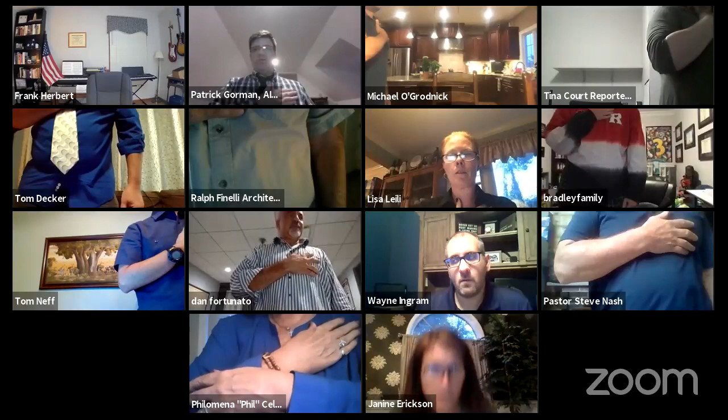I pledge allegiance to the flag of the United States of America, and to the republic for which it stands, one nation, under God, indivisible, with liberty and justice for all.

This meeting will be conducted virtually. The public will be given an opportunity to participate remotely through Zoom by following the instructions listed in the agenda, which has been posted on the township site. All documents pertaining to any applications on the agenda were available on the township website prior to this meeting. Board members, staff, and consultants will be participating remotely. Applicants will be presenting remotely and will identify themselves before testifying.

This meeting has been duly advertised according to Section 5 of the Open Public Meetings Act, Chapter 231, Public Law 1975, called the Sunshine Law. Notice of the 2020 annual meeting schedule has been provided to the officially designated newspapers, the township clerk, and posted on the bulletin board at the Hillsborough Township Municipal Building. Tina, would you take one more thing? Additional notice has been provided to communicate this meeting is being conducted by electronic means only. Tina, would you call the roll, please?

Mr. Stamler, here. Ms. Haynes, here. Mr. Sirachi, here. Ms. Leili, here. Mr. Valchek, unmute yourself, Frank. Here, thank you. Ms. Erickson, here. Mr. Walmarker, here. Mr. Basil, here. Chairman Herbert, here. Mr. Gorman, present. Mr. Anderson, I am here. Mr. Neff, here, and I am here, and Mr. Kinsler is here.

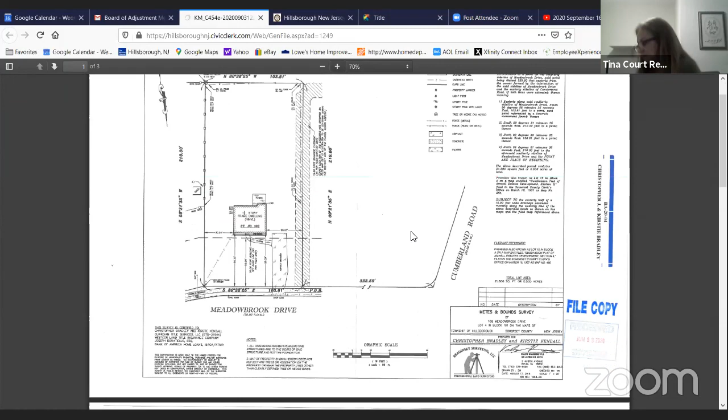Okay. Thank you. On the project, when we need to start, Mr. Fortunato, yes, we need qualification first. Yes, we were going to do the educational background for a moment. Mr. Fortunato, for the board's reference, we need to swear and have you recognized as an expert in this field. Can you please give the board the benefit of your educational background? Yes, I have a Bachelor's of Industrial Design from Ohio State University and a Bachelor's in Architecture from Drexel University. Licensed in New York, New Jersey, Pennsylvania, and have appeared in front of this board several times. Thank you, Mr. Fortunato. At this time, I would ask that the board accepts Mr. Fortunato as an expert in the field of architecture.

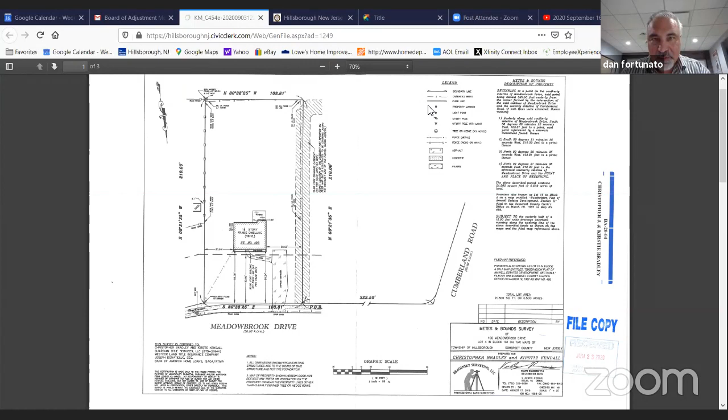When the Bradleys approached me about doing this project, we knew a variance would be required and we knew this going into the project, but basically the needs of the house far outweighs what they really needed to provide here. The house is a bit of a salt box style home. So even though it is a two-story, the entire back half of the house is unusable as a second floor because the roof slopes basically from the second floor right down to the first floor.

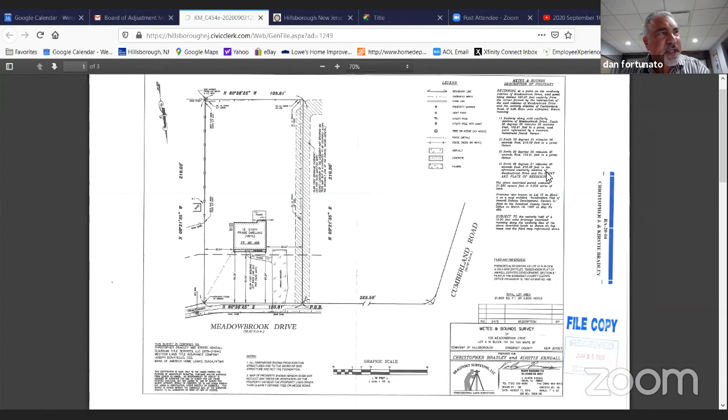So essentially only the front half of the house can be used for a second floor. Looking at the floor plans, slide A1, that's the original survey there. On the floor plan, the right side where the addition is, the gray walls, we needed to achieve a larger home for them since they are a growing family. They do have a newborn, and the master bedroom on the second floor with the master bath suite and so on is really the best option that you can really achieve with this house. Of course, a garage is needed, so we opted for the 2-car garage, and that would accommodate the second floor, which would be the master bedroom, home office, and the bathroom.

And then that's essentially the part that is in a violation or encroachment for the setbacks. The rear part of the house, which is not in violation, is an extension for their home, a dining room and a mudroom coming off of the garage. Basically, the rest of the house will remain as is. They have a living room and a dining room and first floor playroom. And of course, the bedrooms will be on the second floor, basically making this a 4-bedroom home.

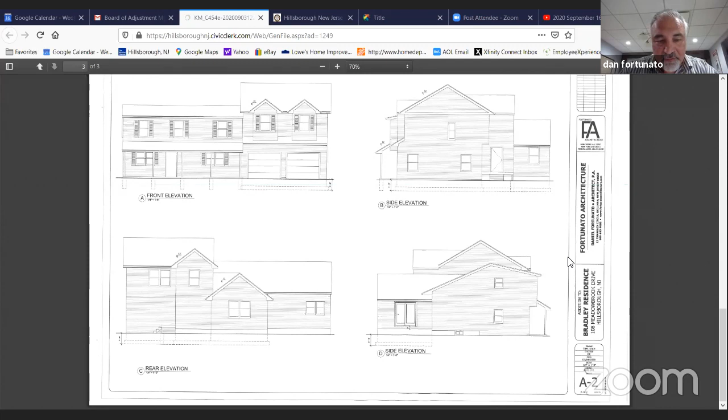If you can go to drawing A2, thank you. So as you can see, the left side of the house, which is existing, is a lot lower, again just based on the salt box style construction of the house. And the right side will be the 2-car garage with master bedroom suite above. We tried to make it look as much in the vernacular of the neighborhood, not too loud, and it works very well for their needs. So essentially, this is the project that we need to have the board take a look at and see if we can move forward with this project.

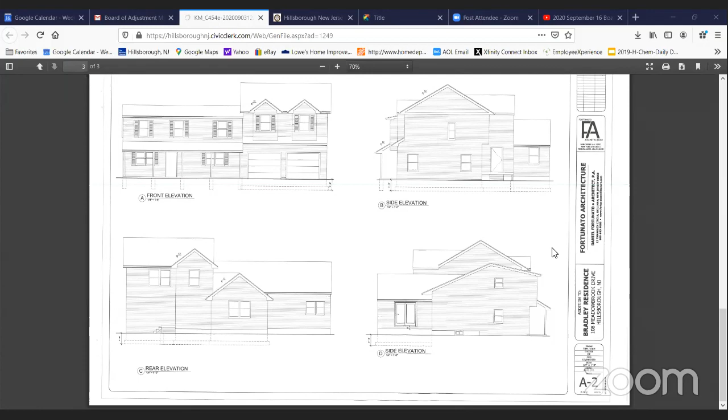I don't see any diagram of where the existing driveway is. I'm assuming now the driveway is going to be doubled. It's on drawing A1, if you could please go back to that slide. The upper right-hand corner, if you could zoom into the site survey, upper right-hand corner, you'll see the driveway indicated on the right. It's a little faint, but you can see it there.

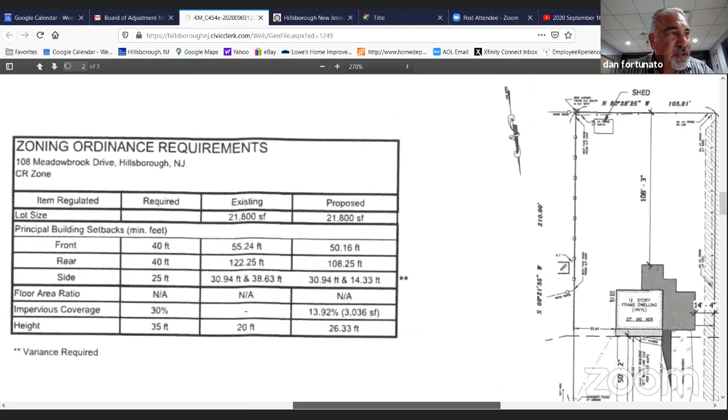There's a little bit of a dark gray sliver. That's essentially just showing the extension of the driveway to meet up with the 2-car garage, but they do have a driveway to nowhere, basically no garage there.

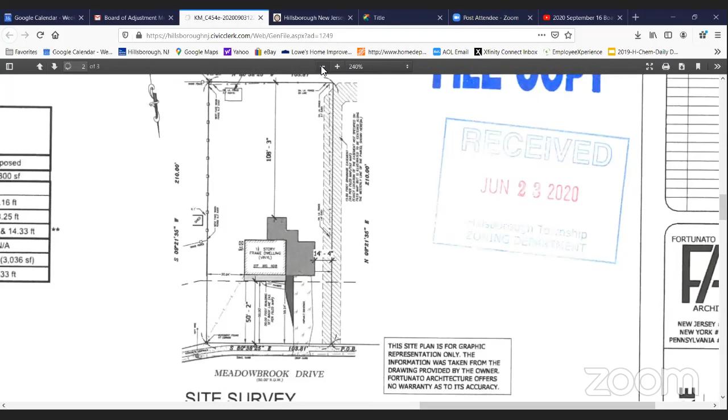Right. Now, I'm looking at the neighbor's house next door and going over what's required. How close to the other dwelling is that addition now? Because now you're adding the addition and the driveway, and I'm looking at a satellite view and it's pretty tight with that other house. So what's the distance between the two dwellings with the new addition and driveway? I do not have that information.

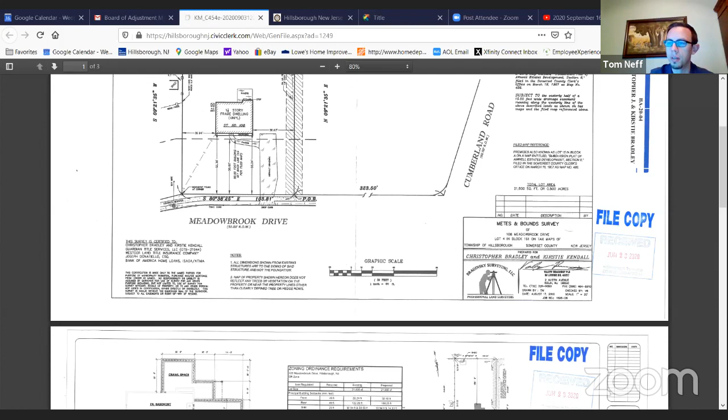Does our engineer calculate that? I do not have that dimension. The plans don't show the location of the house on the adjacent property. Yeah, and that's what's disturbing to me, that we're not showing that other neighbor's house with these plans, and it's pretty tight when I look at the satellite view.

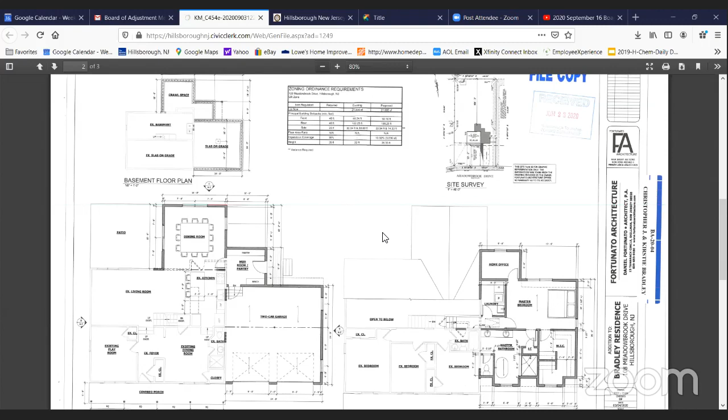All right, thank you. Any other questions from board members? I had a couple of questions myself.

First of all, this house never had a garage, did it? No, it did not. Yes, this has to be one of the few in Hillsborough post-World War II that didn't. I think there's maybe one other.

The other thing, I noticed down the block, about 3 or 4 houses down, there was another house that looked like it might have had the same situation where they made an addition, which then brought the house close to the property line to the house next door. Are you familiar with that house? Okay.

I guess not, right? Is there a question? Yeah, I'm just saying, is this the only house like this on the block that's going to be in this condition, or is there another one sort of like the same thing? If you don't know, just tell me you don't know.

Well, there are 2-car garage structures on the property, on the block. This is the only one, like I said, probably the only one without a garage currently. Okay, and that driveway was probably always there, if I got it from the curb cut. That's correct, the driveway always was there. We're still maintaining the same driveway, same curb cut. We're just going to widen it a little bit to accommodate the 2nd-car garage.

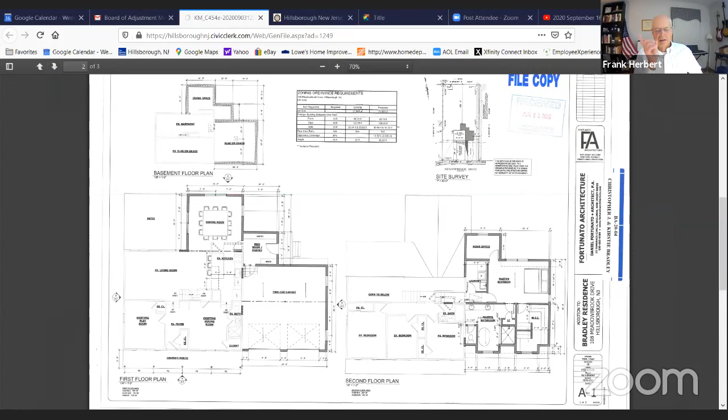Well, I think there's a house 1 or 2 over without a garage, just to let you know. Yeah, there was at least one other on the block, but I think 3 or 4 houses down to the left. Frank, I don't know what your point is. Yes, there's houses I could see with garages, correct, but there's some without.

Any other questions from other board members? This is Phil Solili. I hear what John is saying, and I think I share that same concern. Not knowing the distance between the 2 dwellings and the property - I'm not going to say adjoining next to it, but close to it - I would think that we would need to have that information.

This is Tom Neff here. Don't quote me on these dimensions, but I'm just looking on Google Earth and using their built-in measurement tools, and it looks like the adjacent house on the side of the proposed addition is about 55 feet between that adjacent house and the current edge of the house.

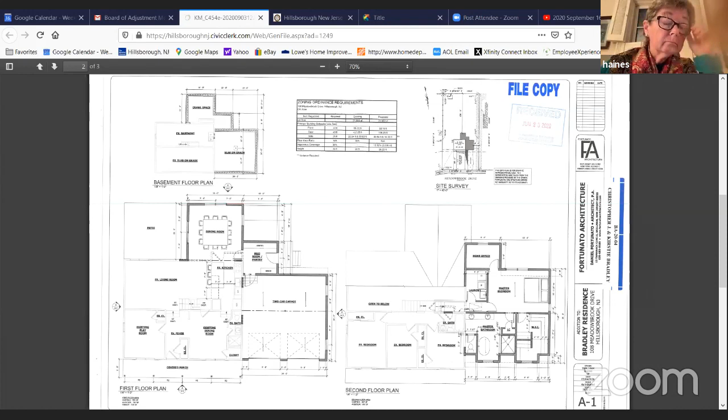So question for the architect then, how wide is the addition you're proposing? 24 feet. So it looks like it'd be about 31 feet between the proposed addition and the adjacent house, if these measurements are accurate. Has the property owner of that adjacent house been made aware of this, and do they have any concerns?

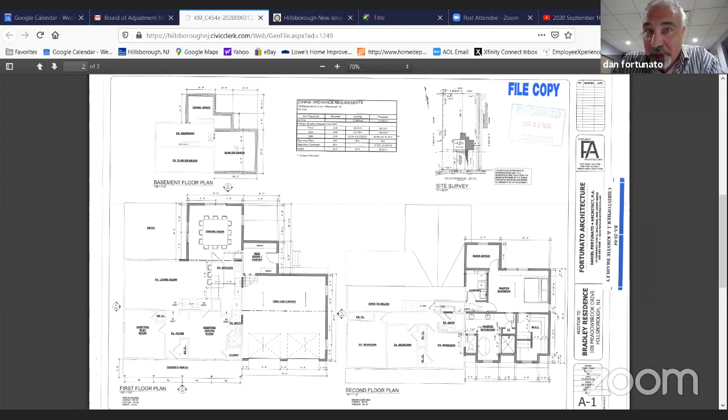Well, if I may, the dimensions you're stating from Google Earth, we have a 14-foot 4-inch dimension we're proposing right now to the property line. And the setbacks are basically supposed to be 25 feet in this area. So I'm not sure if that means the house is 25, the one next door you're questioning could be further than the 31 feet you're stating.

That's... well, how about this? You see that back fence? With the addition that's being added, is it even with that back fence? Or is it less than where that back fence protrudes out?

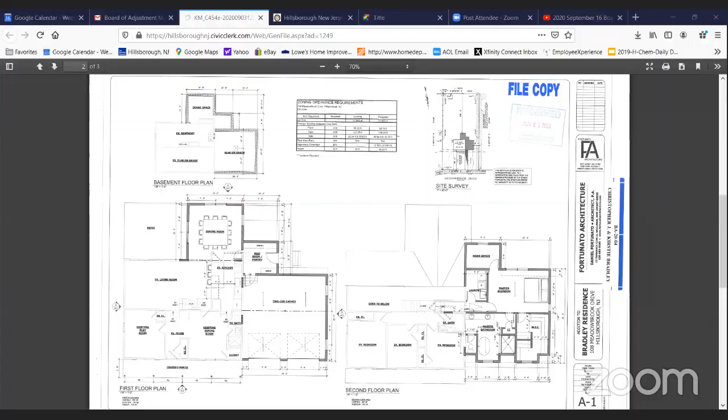Excuse me, this is Fred Kinsler. I just want to make sure, can everybody see on the screen the lots, or do you still see the architectural drawings? Still seeing the architectural drawing. All right, hold on one second. Okay, I'm sharing this now. Can you see the lots? Yeah, that's much better. Okay, sorry about that.

I'm sorry to interject, but I figured this might be helpful for what you guys are talking about. No, that's okay, thank you. Very helpful.

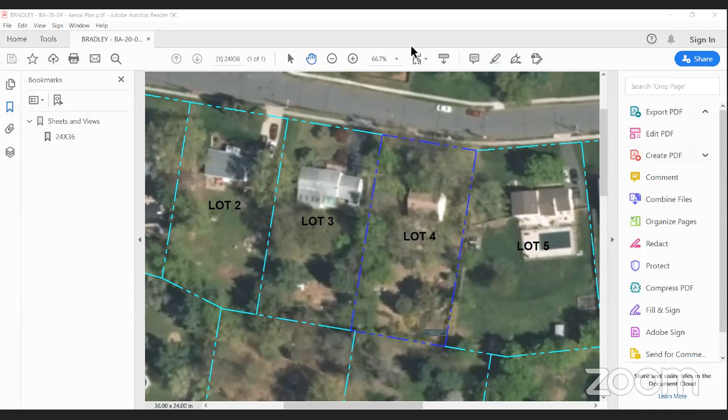Well, looking at the way it is right now, lot 5 is a lot closer, it's got to be closer to 25 feet, as well as lot 3. Again, they're probably closer than 25 feet on their side yard as well. Just eyeballing it here, lot 6 as well, so they're all pretty close. Lot 6 and 5 give you the closest example of what we're going to have here between lots 4 and 3.

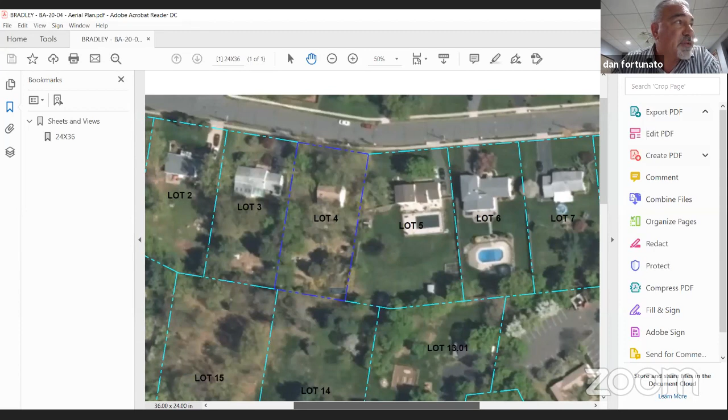I agree, that visual you have up now is very helpful. Sorry, I tried to get it up earlier, I wasn't sure, I didn't want to interrupt.

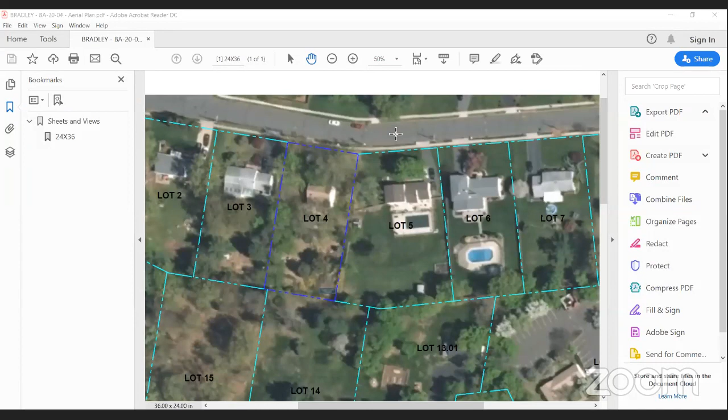Yeah, that... right, that's an old photo, right? I don't even see the fence, I don't even see the driveway. I think the driveways are probably under the trees. I don't know.

Hey Frank, it's Patrick. For the record, what is this we're looking at the moment? Sure, this is the document that was provided under the Bradley application. I believe it's called photos, or the aerial plan. It was the aerial plan that's in Civic Clerk, and Eva sent this to me as part of what was going to be presented. Okay, I just wanted to announce for the record purposes.

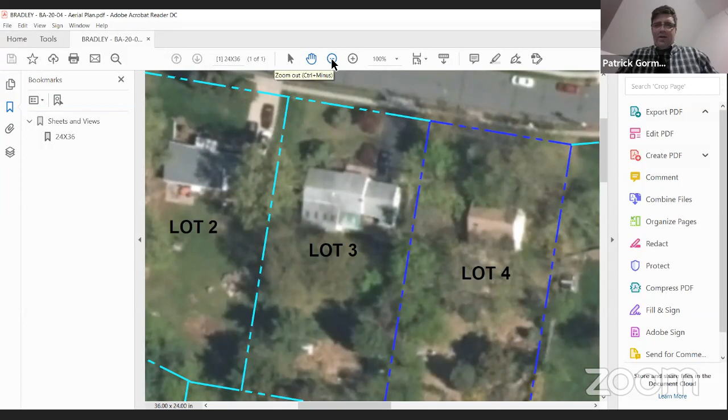Absolutely, thank you. Hey Patrick, lot 3, he looks like he's close to the property line. Does he have a variance for that addition? I mean, with these things with the aerials, it looks close, but depending on the angle, sometimes these things are done, things are a lot farther, but I can see what you're saying.

Yeah, John, my impression when I went out there was that the house on lot 3 probably was like this one at one time, and they added a garage on, which brought it closer to that property line. Well, that's obvious, they added it on. Did they? No, I didn't say that. It might have been original, but maybe not, I don't know, you can't tell.

Right, but my concern was with the new addition. When I look at the street view and see that fence, I'm wondering now with the addition, how close in proximity it is to that back fence along the border. Well, I don't know, maybe that neighbor's here, I'm not too sure, but that was my only question, because with the addition it's close to that other one. That's all, thank you.

Any more board member questions? If not, I'll ask for a motion to open public.

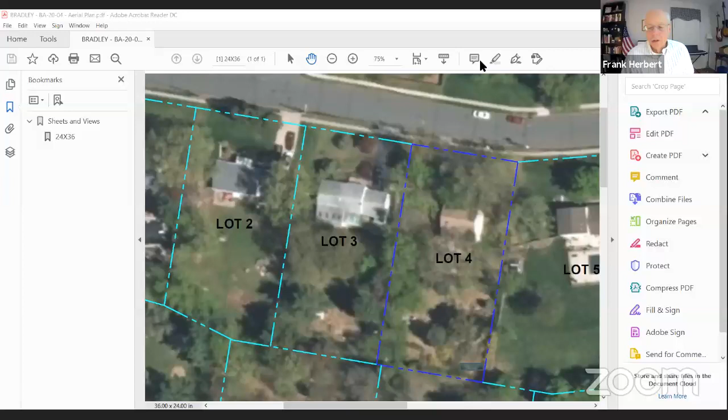I have a question. I used to actually live in this neighborhood, and I do know the lots are a nice size, but was there any consideration given to doing a drawing that would have gone to the back of the house to alleviate the need for the variance? I understand you're doing it over a garage, but was there any thought to doing it out the back instead?

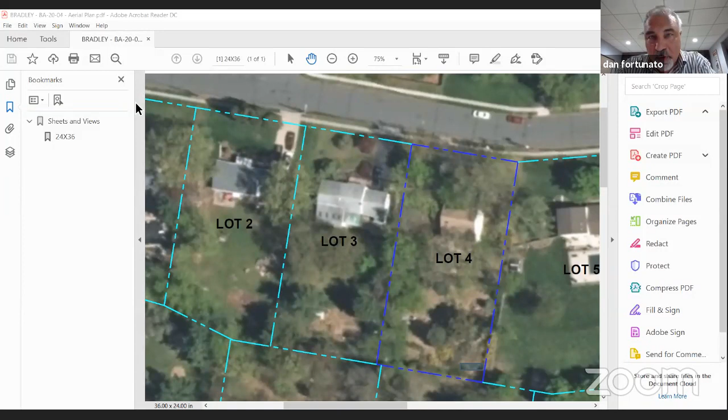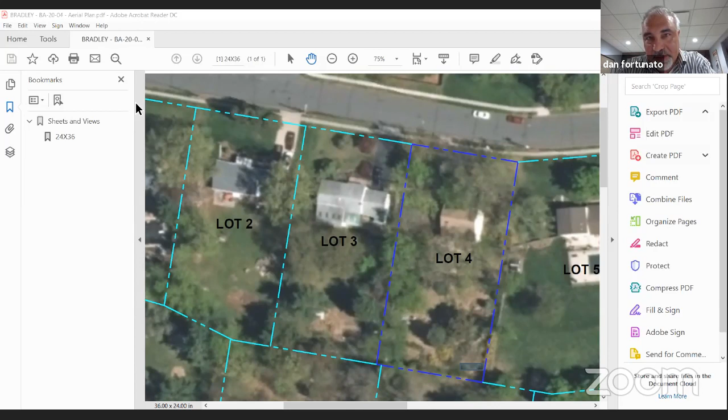No, only because the second floor was very difficult to work with. If this was a standard 2-story colonial, we could probably do something like that. But since the whole front half of the house is where the bedrooms are, we couldn't really get a bridge, if you will, from there all the way over to the back of the house to accommodate this. So we're just trying to keep the bedrooms in line towards the front of the house.

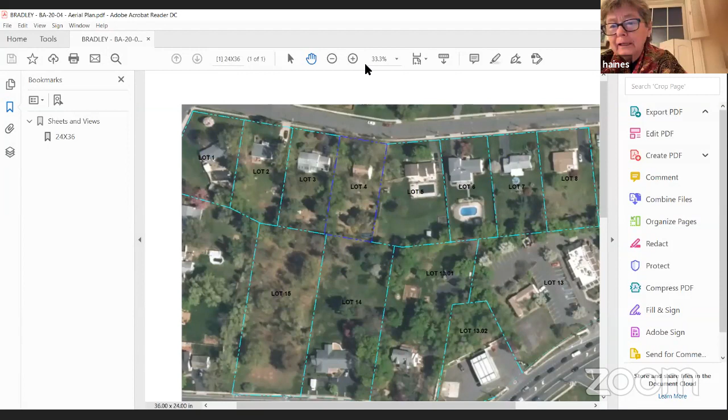Well, not only that, but as you stated earlier, the roof slopes down pretty severely towards the back of the house. I don't know if that makes it much more difficult to add on. No, I remember the model, so.

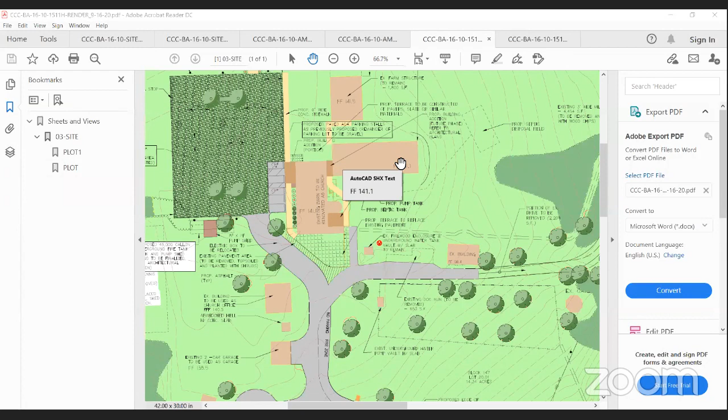Okay, let me share that one. Just give me one second. Share screen. That one? Yes. Okay, can we pan out to show the whole sheet? Yep, let me get there. Does that look better? Excellent, thank you. You're welcome.

Pardon me, Tom, Pat Gorman here. Is this an exhibit or something we already received before? This is an exhibit. Essentially, it's a colorized version of the site plan that was submitted.

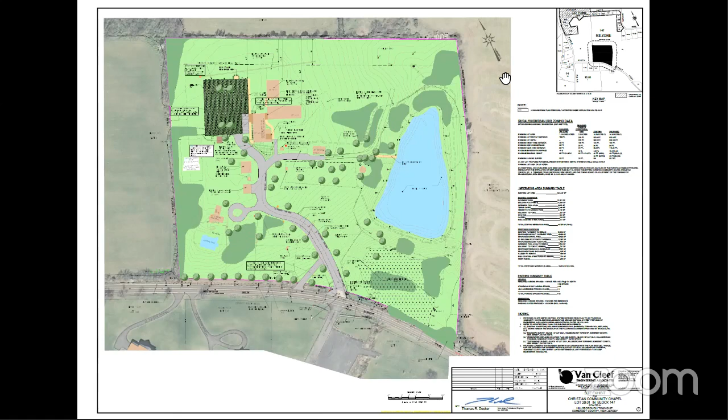Patrick, this is Fred. This is also from Civic Clerk. This has been submitted and is on the documents that everybody has access to. Okay, just confirming. Yep. Okay, so we don't have to mark it as evidence then, right?

Mr. Chairman, we of course have the question of what we do with exhibits with these Zoom meetings. I think that anything that's posted on Civic Clerk has already become a part of the record. And this particular drawing, I think, has been very specifically identified by Mr. Decker. So I don't think we can physically mark it anyway, but I think it is sufficiently identified.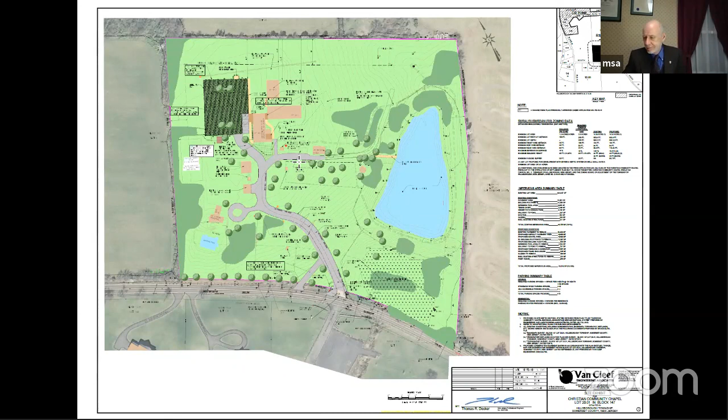I'm marking on my screen here. Okay, good. Yeah, but your grease pencil, not good for your screen. Okay.

It's hard for me to do this. I'm used to pointing. If you want me to zoom in, Mr. Decker, just let me know.

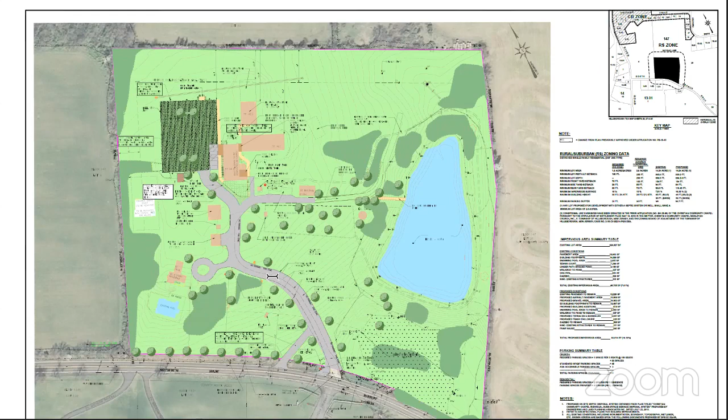So what's shown here is the proposed site layout as submitted. It is essentially the same as was submitted prior. You'll see at the bottom you have your access off of South Branch Road. The gray shading coming up is a widening of the existing driveway to a width of 25 feet. That continues up, and as you follow the cursor, straight ahead is where the barn is located. That will be converted.

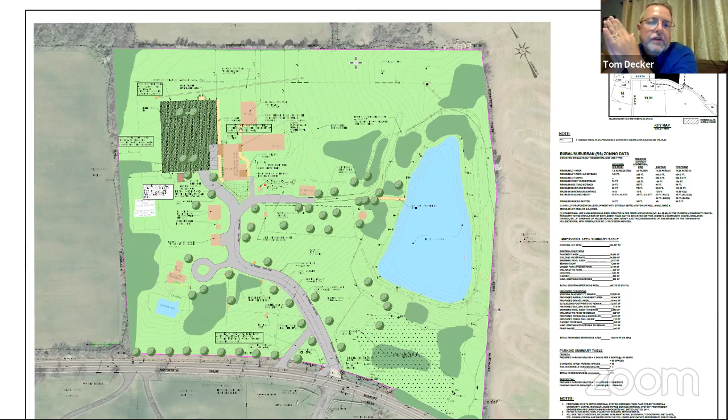To the left of that is the parking area, which is no different than what was proposed earlier in the prior application. It has the same number of parking spaces, the same configuration. The only difference is that we're proposing a gravel surface for most of the lot, with the ADA parking spaces closest to the building to remain paved.

Hey Tom, it's John Stamler. So the paved parking lots will have white lines and the gravel will just be gravel, correct? Correct. The paved portion will be striped for ADA spaces, with striping in between, and the rest of the lot will have wheel stops, consistent with what was proposed previously. There's no curb around the parking lot. There was none previously. We're really just changing the surface.

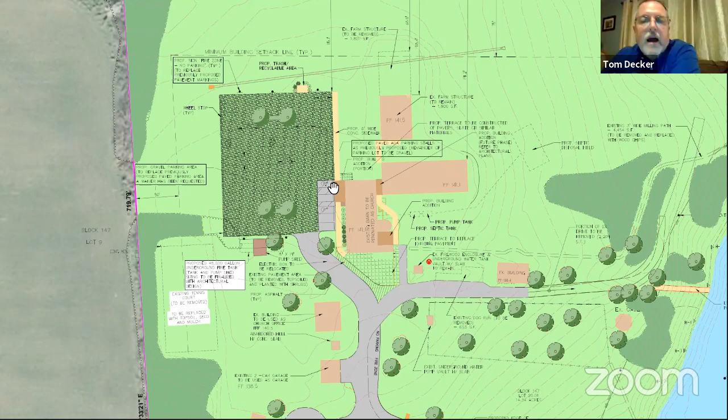Tom, there's going to be only 2 ADA places, right? I believe there's actually 3. All right, but that's the only part that's going to be paved. Yeah, there's three, and if you look there, in that paved area, the 3 ADA spaces are towards the top. There are 2 regular parking spaces that are also paved, primarily because it was easier to square off that area rather than have just those paved spaces sticking out into the gravel. So there are two other regular spaces that are going to be paved.

Tom, the other thing is, how do you plow sufficiently for a group of people of all ages to come to worship, to attend other church activities? How do you say that it's going to be as safe as if it were macadamized, where you can plow pretty much right down to the surface? That is a very good question.

Gravel parking lots are plowed on a regular basis. You don't put the plow down all the way to the surface, otherwise you end up scraping the stone to the end of the parking lot, and it has to be dressed up afterwards. Inevitably you do get some stone that gets pushed, and then it has to be dressed up. It can be plowed, but it would not be plowed as cleanly as a paved parking lot.

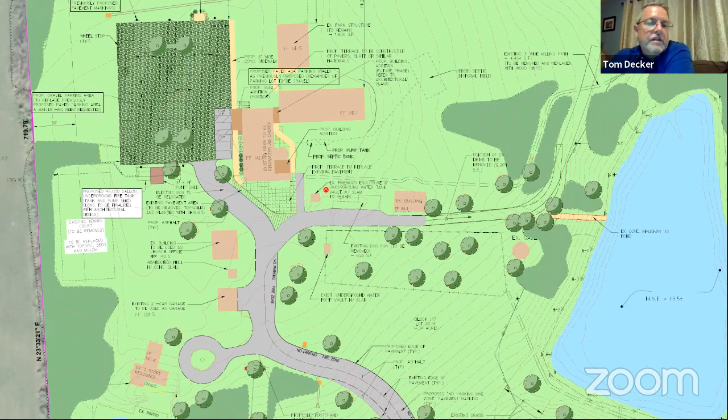There was a tennis court in the lower left-hand corner of what's being shown. That tennis court has since been removed, so the impervious has already been reduced there. There's a stormwater management basin in the upper right portion of the property that was proposed, and that has also been constructed. The septic system, or septic field, has been constructed as well.

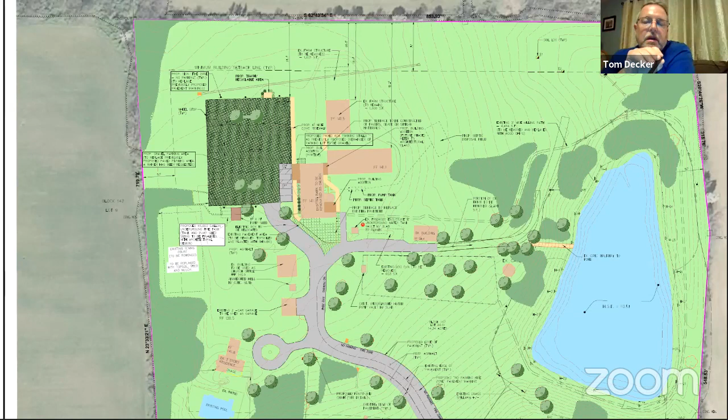As far as stormwater management, although we're proposing the parking lot to be gravel, we have not changed that in the design calculations. It's still being considered a paved surface for stormwater management purposes. So should that parking lot be paved sometime in the future, stormwater management measures will already be in place.

Let's scroll down to the entrance from South Branch Road. You want to go up to the top? This is good, this is good.

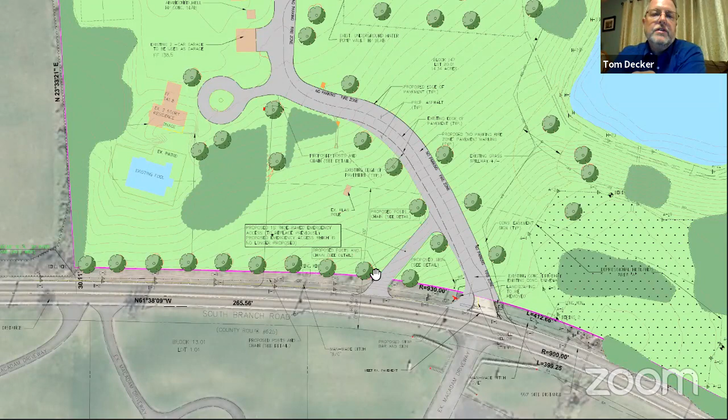As the board may recall, in the settlement stipulation there's a requirement for a secondary access to the property. I have another exhibit I can pull up if needed to refresh the board's memory. That entrance essentially came off — if you were to extend the driveway shown coming down the top of the page straight down toward South Branch Road, that's where the emergency access was. It was a steep grade.

It required significant grading, and it worked, but the county — Somerset County, since this is a county road — wasn't in favor of having a secondary access. However, they acknowledged the safety benefits as Mr. Winiger had requested. Back when we were resolving things with the emergency access, we had a site meeting with Mr. Winiger, the county, and the engineer at the time, Bill White, and we discussed this.

We ended up leaving the location of the drive where it was. However, the county suggested we move the emergency entrance over to where we have it currently shown on the plan, which is now shorter and follows more parallel with the contours, so it's actually a flatter grade. That would still serve as an emergency access. It would be chained off at both the entrance off of South Branch Road and also up at the drive.

I know Mr. Winiger, in his review memo of August 26th, had asked that it be chained and that there be a no parking sign and a sign saying do not block emergency access road — we would certainly do that.

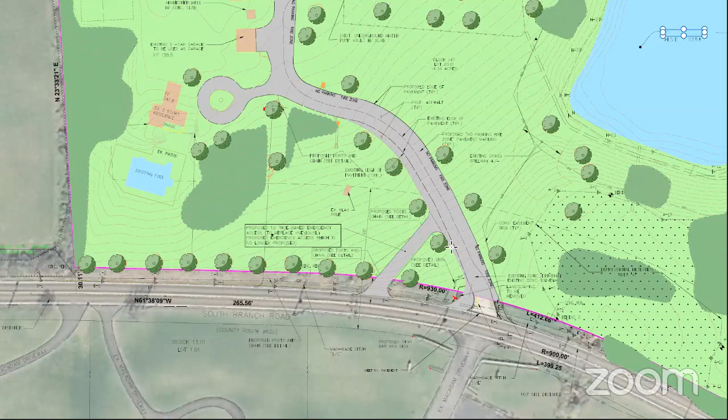Right, you said they had an issue with the second entrance on South Branch Road, but it's still there, you just changed the angle. Right, they had concerns. Their initial review letter wanted us to remove the secondary access because they didn't want a second driveway for the lot coming in off the county road.

So we discussed it with them and explained it was part of the stipulation, part of what Chris had originally asked for, and we complied. We had a meeting out there to try to find a better way to achieve that, and the engineer from the county recommended bringing it over to this location so it did not have as steep of a drive, and the approach to the county road was not as much of a 90-degree.

They were concerned with the fire trucks being able to access up there, and this was preferred. Now, obviously, we have to get approval from the county for this relocated drive. Back in, I believe, maybe February, Ralph Finelli and I stopped into the municipal building and met with Chris to discuss the layout.

And we proposed this location, and at the time Chris was amenable to moving the location down here. Again, this is one of the reasons why the impervious cover is decreased from what was originally proposed.

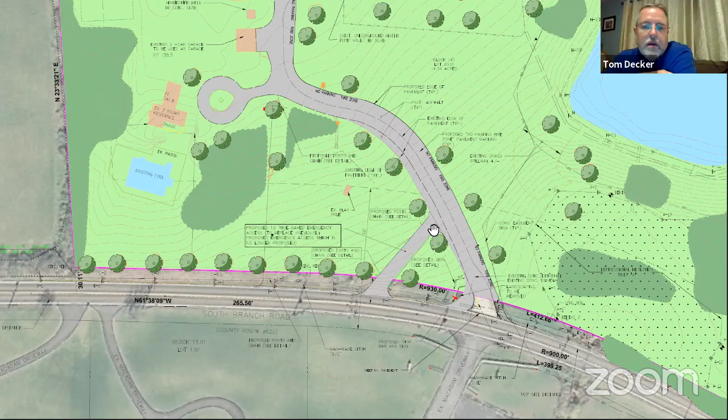And if I can add, just from a dimension standpoint, from south, coming along the main driveway from South Branch Road up to the emergency access is 100 feet. I'm talking about the access road itself. That's only at least, what, yeah, that. You mean as far as its width? No, its length. That's about 100 feet also.

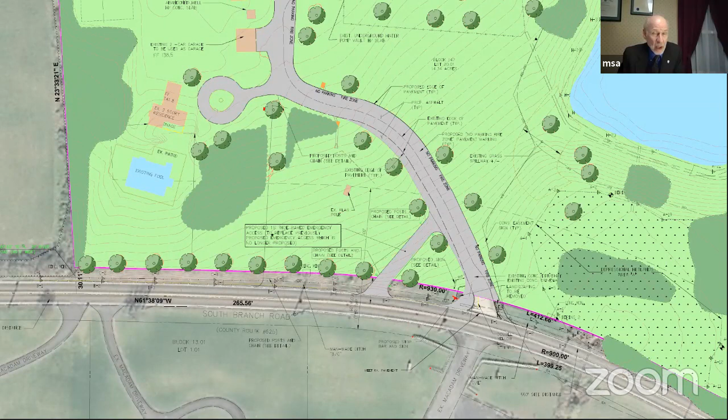Okay, well then the original one was about 300 feet, correct? Ms. Haynes, Mr. Decker referred earlier to the fact that he has another exhibit. I believe I know what he's referring to, and perhaps it would be useful for everyone, particularly people not familiar with what transpired before, to see the original diagram so they can make a reasonable comparison. If we can pull up the plan titled Render, it's got a 12/19/16 date on it, right above the one you just opened.

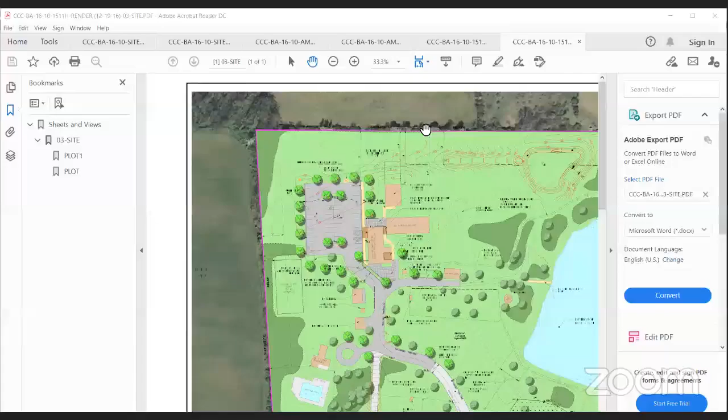Tom, just from looking at that diagram, I don't know what we're buying by having a dual access when you're only talking about 100 feet, when I think the original proposal for the 300-foot emergency lane was to eliminate or divert getting caught up with the exiting cars. So, to me, it looks like you just eliminate what is being proposed now, because 100 feet is nothing. Okay, if we can scroll down on this exhibit, just to touch on that, and Chris can correct me if I'm wrong.

One of the reasons for the secondary access, my recollection is Chris's concern was if there was a blockage at South Branch Road. So say at the main entrance, the emergency service vehicles, for whatever reason, could not access at that point, they would have a secondary access on South Branch Road.

I'll wait to hear from Chris too, because he's the expert, being a fire marshal. I would like to hear from him, and if he can get his trucks up there and has experienced everything. No, I understood.

So what we have here is actually the rendering that was presented at the original site plan back in, I think it was 2000, it may have been 2016. Presented, or is this the approved plan? This was approved. This is the approved plan. Okay, thank you for clarifying. Yep, this is what was approved.

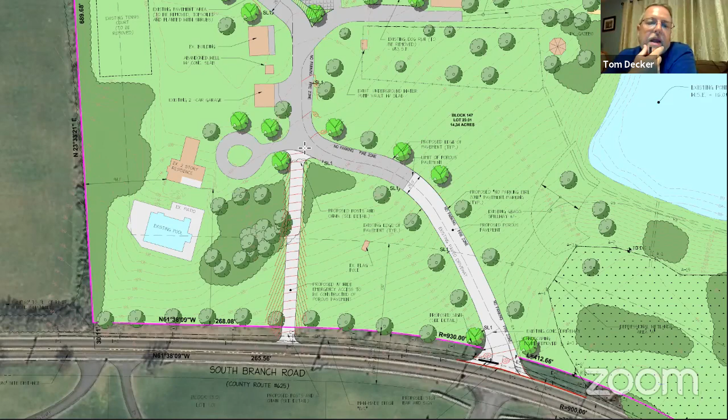So you can see this is where the emergency access is. Going back to the question of what are we buying, you can see there's grading shown there, and the grading is significantly steeper than the proposed access. So from a vehicle access standpoint, it's steeper. By moving it, we flatten it out significantly, because now we're running more parallel with the contours. I do have in the package exhibits of the profile of the original proposed and approved access lane and a profile of the proposed access lane to show the difference in grade.

The other benefit by moving it over is that there's better sight distance along South Branch Road. While we achieve minimum sight distance in the original layout, the proposed layout provides even more sight distance, particularly going towards the west.

Tom, I don't recall your testimony going back to the original 2016, 2017 plan that you had any objections to the location. I think it was your plan to put it there. And I know Chris has been concerned recently, and we'll hear it from Chris, that somebody said it wasn't feasible. From an engineering perspective, not talking cost, I'm assuming that what you put on the plan in 2017 was feasible from an engineering standpoint. Is that correct? It might be more costly and a steeper grade, but was it feasible?

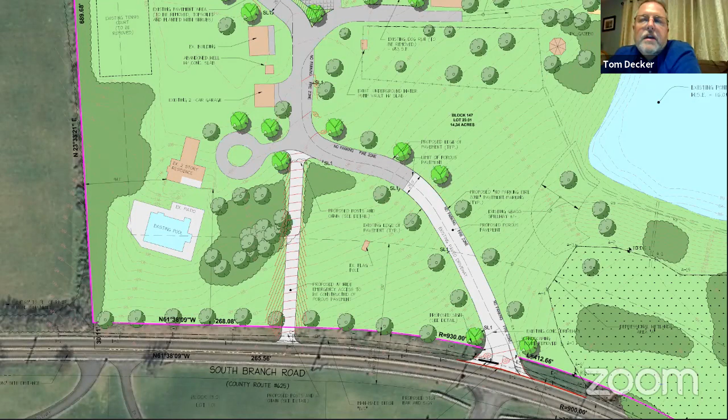Okay, well but then how could you put it on your 2017 site plan that we approved in 2017? Because what had happened was the county issued a letter saying they didn't want the driveway there. However, there was the stipulation, the settlement stipulation, which required an emergency access. So the county issued a follow-up letter saying, okay, we understand there's now a settlement agreement that requires this access.

So it has to go in, but it has to meet the county requirements for approach to South Branch Road, which required additional grading and so forth. So they didn't really change their mind, but they accommodated the settlement agreement with the town.

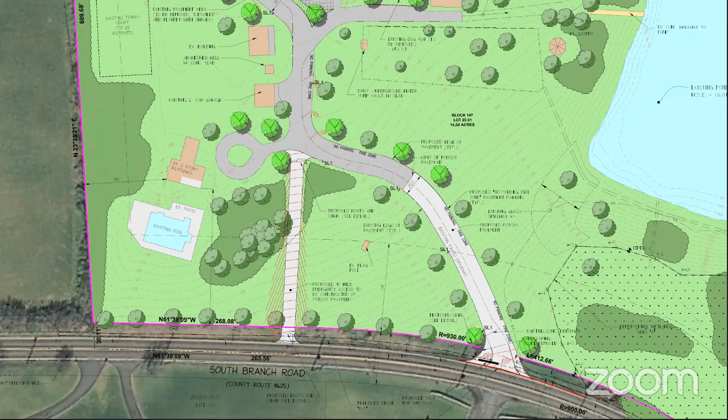Hey Tom, it's John Stamler. I'm just going to cut to the chase. With both accesses, what's the cost difference between them? I'm not suggesting cost as a factor, just asking what the difference is. I don't have that number off the top of my head, but I'm going to say what we're proposing is probably half the cost of what was proposed prior. Okay, thank you.

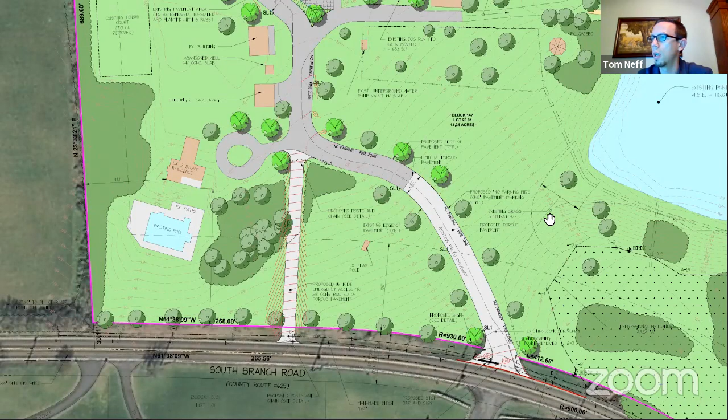This is Tom Neff. I have a quick question. Can you quantify the difference between the two slopes and grades? The original profile looks like it was 11.2% from your plan, which I'd agree is rather steep. The second profile you submitted looks much more gradual, but I don't see a grade or slope percentage on there. Do you have that number?

Yes, actually, if we can open up another exhibit, it would be the amended site plan titled Amended Site 9/15/2011, labeled emergency access. It's the third one from the bottom of the list on the website.

Can you put the site plan back up a minute? Hey Frank, we have Chris. He's going to speak too, right? I'm waiting for him. Like I said, I want to hear what Tom says first. I have a couple of questions myself for Tom, then we'll go to Chris. All right, go ahead, Frank.

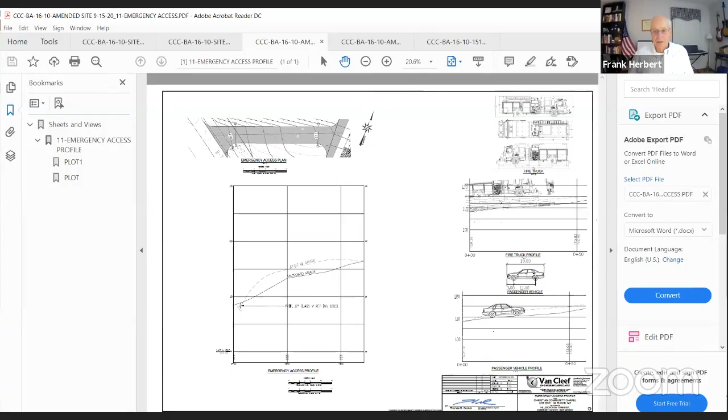Hey guys, real quick, for the record Tom, this is something new that wasn't included with the original plan set? Correct, this was not included with the resubmission. I apologize for that. This is something we thought might be helpful in demonstrating the slope of the drive.

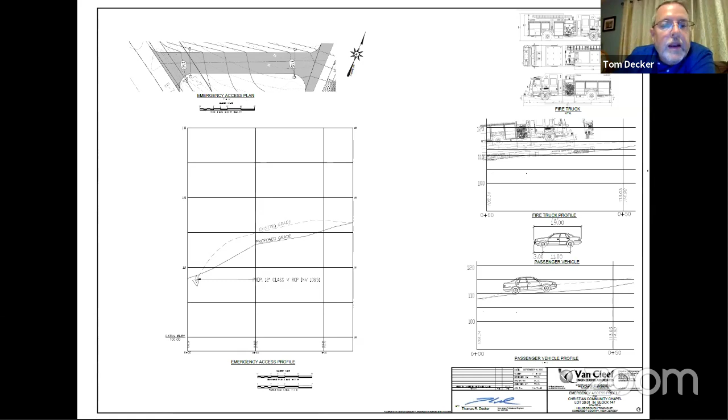I see that we did not label that slope, but I can figure that out. Is this in the current plan? This is the current emergency access we have shown, not the original plan approved in 2017. No, this is what we're proposing now. If you want to see the one from 2017... That was going to be one of my questions, because you had a sheet 6A and a sheet 11 showing the fire trucks going up the grade, and that information wasn't in the site plan we received.

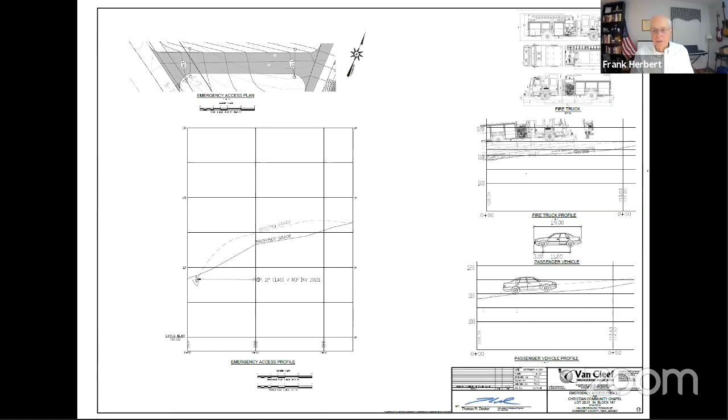Now this, and I apologize for that. This is, let's see, I believe the same sheet 11 from the 2017 set, but revised to show the new emergency access location. Okay, so this will be put back and become part of the current proposed plan then. Correct. If you'd like to see the old location...

I'm sorry, Tom, Tina, you might want to mark this since it wasn't included with the original plan set. Mr. Chairman, I understand Mr. Gorman's concern. I was concerned about it too, then I thought there was a resolution. Now I'm not so sure.

Is the drawing currently on the screen part of what's posted? No, it's not on Civic Clerk. Excuse me Chairman, this is Fred Kinsler. This was given to me by Eva, our planning, and I believe it is on Civic Clerk. Because I just picked up a full set on Friday and this was not in that set.

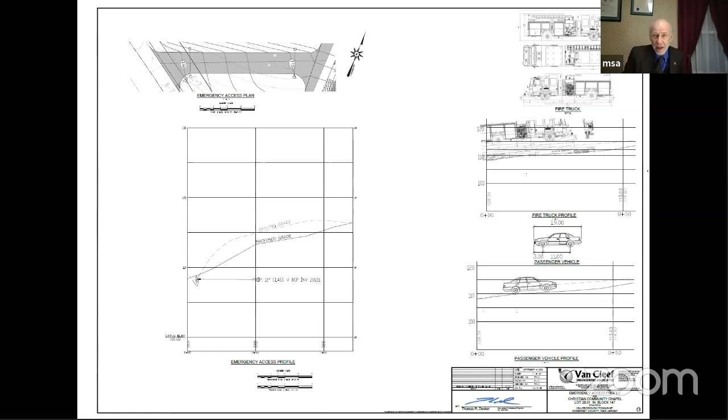Correct, I sent an email. I think there were things added recently, but the simple answer is if we can confirm this is on Civic Clerk, my recommendation is as it was before for other things on Civic Clerk. If it is not, then I take Mr. Gorman's point that this needs to be identified as a new exhibit. I am able to view this from Civic Clerk, I see the link on there for it.

Okay, is there also a sheet 6A? Excuse me Mr. Chairman, this is Fred Kinsler, I have Civic Clerk on my screen here. Tom, can you rename that? Amended site plan, sorry, what was the number? 2011 emergency access? The one you have up now? Yes, that was the 2011 emergency access. Mr. Chairman, it is on Civic Clerk as CCC BA 1610 Amended Site 9/15/2011 Emergency Access. It is there for the public to see.

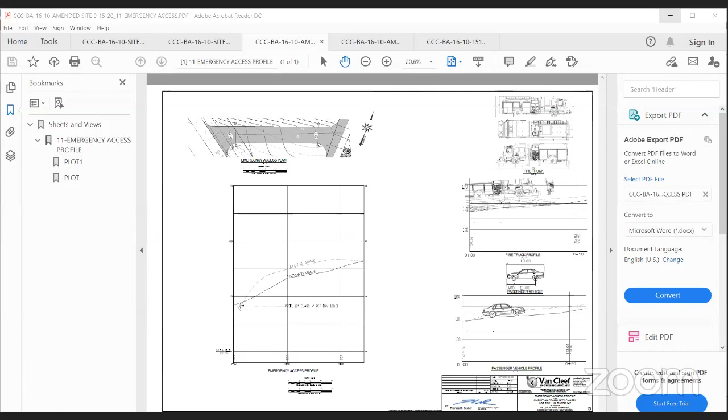Okay. Okay, that's good, thank you. So this is what's proposed, I believe, because the file names are different than what I have. I believe the original approved fire lane is shown on the one titled 10/24/17 Emergency Access Road.

I can assume Chris saw this. Yep, that's it. That's it there.

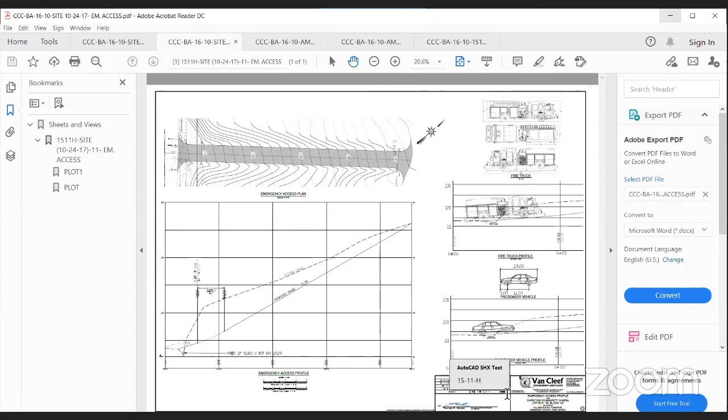Okay, so this is what was originally proposed. You can see there's an existing grade line. This was what was originally approved. The dashed line is the existing grade, the solid line is proposed grade, and each one of those horizontal lines represents 5 feet. So you can see there's a significant amount of excavation and cut in there, and you can see how steep the drive is at that 11.2%.

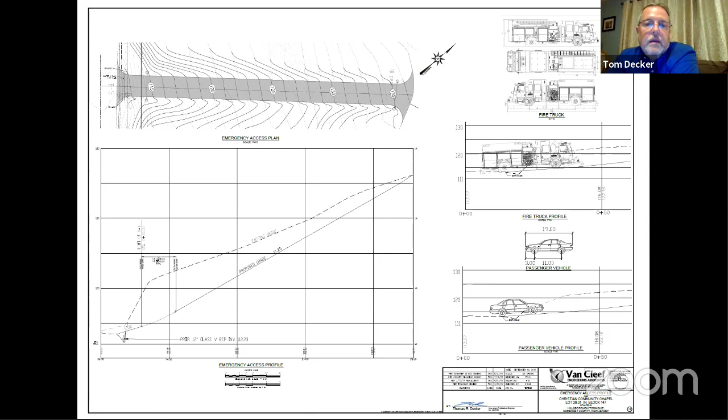Now, if you were to flip to the other plan that we just had up, you'll see that in the profile we have a much less cut with the embankment, so that's less disturbance, and the grade is flatter than what was originally proposed.

So Tom, that's this, originally approved. But the proposed is much shorter and is down towards the bottom, towards South Branch Road, which is not the steepest part. The fire trucks are still going to have to go up what you're proposing, mostly on the public driveway, which gets to be quite steep itself.

Is there any reason why your proposed one can't be made longer and run parallel closely to the existing public driveway? Cost should not be the factor here. You want to get your emergency vehicles up there as quickly as possible.

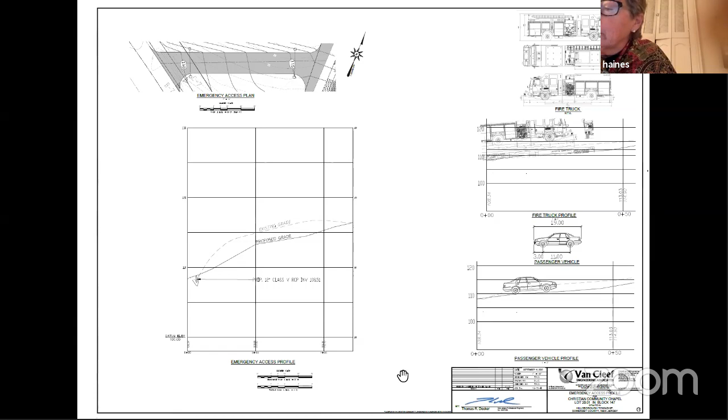Hey, Chicky, I understand your question, and I think I've understood it a few times already. Can we wait, can we hear from Chris, and then we can ask some more questions about what you're talking about?

Because we're concerned about the emergency vehicles making it up there with a full parking lot of people coming down, right, Chicky? That's part of it, yes. Right, so I would like to hear from the fire marshal.

Well, let's complete this with the witness first. Certainly, it's important to hear from the fire marshal separately.

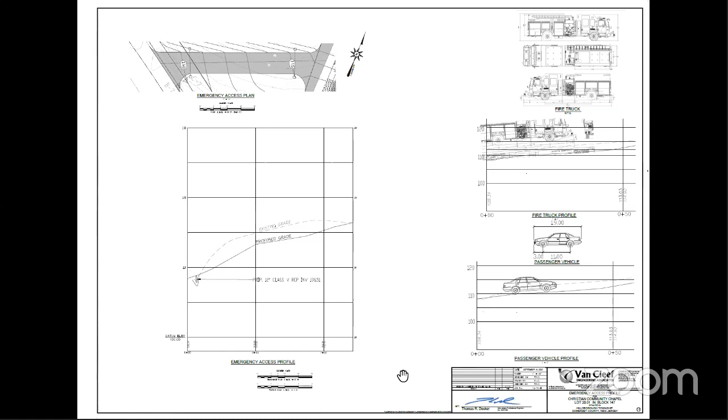I believe there were a couple things in your engineer's report. I think I've addressed most of them. There were a couple questions as far as the DEP permitting and letter of interpretation. The LOI was issued for the site on January 24th, 2017. That has a 5-year life to it, so that doesn't expire until January 24th, 2022.

We also have permits for the approved entrances off of South Branch Road, because they do cross some wetland areas there. Those permits were issued on August 14th, 2017, and they remain valid until August 14th, 2022. I will say, by moving the access drive to the east, as we have proposed, we will need to get an amended permit from DEP for that location, which we will do subject to, if this meets with the board's approval. We would certainly accept that as a condition of approval, that we obtain that permit.

I believe we had addressed all the other items, unless... I just have a couple comments, questions.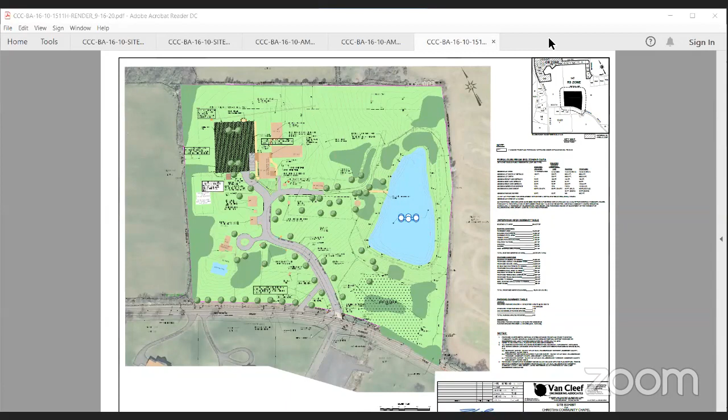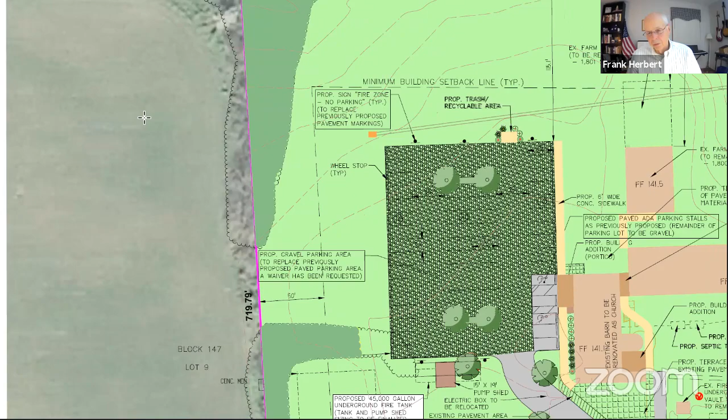My question is, if a van is parked in one of those spots and somebody's in a wheelchair, do they have to be pulled across the gravel, or can they get into the building on a paved surface? Let's say I'm in the topmost spot, and I'm in a wheelchair. How do I get into the church and onto the other properties? The space just below that is also paved and striped, with no wheel stop, and that accesses the sidewalk in front of the church. So they can reach the sidewalk without crossing the gravel. Correct, same thing with the other two spaces that are there.

Second question I have about gravel. The problem with gravel is you can't go down to the surface or you move all the gravel when you're pushing snow in the wintertime, so you have to leave an inch or two of snow in place. And when the sun comes out, it melts and then ices up. Is that a hazard for people that need to negotiate the parking lot?

You mean from a pedestrian standpoint? Yeah. I suppose there could be issues if it's not cleared properly and salted. You would have that situation if a paved driveway or parking lot wasn't plowed properly either. Right, I understand a paved parking lot is obviously easier to clear snow on. So you think they could still solve the problem by just dropping more salt?

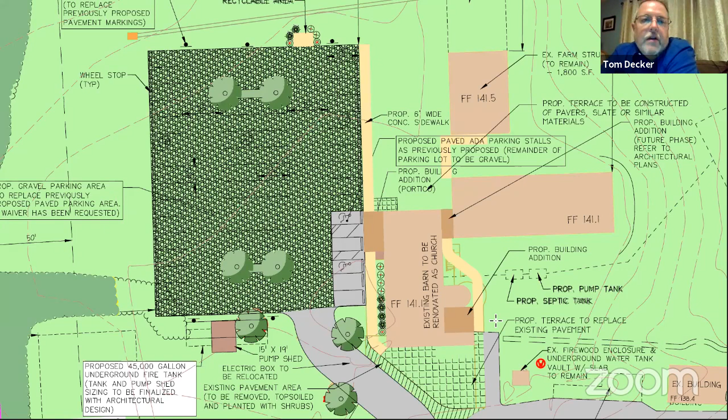Probably. I go back to the location at the North Branch Reformed Church, it seems to work fine for them. That's been that way for... I've been living in that area for 30 years, it hasn't really changed. Every time I pass that church, I'm amazed that the stripings don't move more than they do, they seem to stay in place somehow. Yeah, they do seem to stay in place. So it can work. Okay, that's my questions.

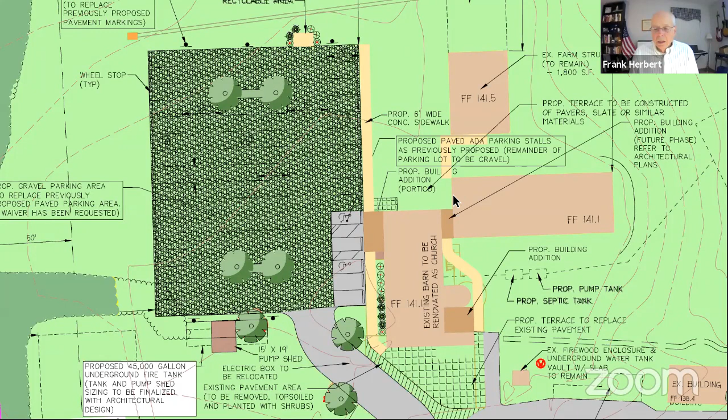And it's John Stamler, to add to Frank's: is there any type of drop-off point, for instance if it's snowy, can folks drop off close to the building? There is a pull-off area, indicated before, off to the right, which has a patio next to it, which then has a sidewalk connecting to the barn, so someone could be dropped off there.

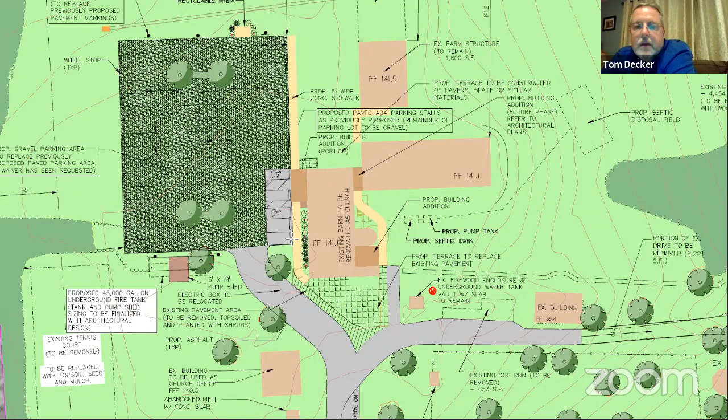The church could, for a drop-off, designate those two lower non-ADA spaces that are paved as being for that purpose. I would definitely recommend that, because in the wintertime, if there's a banquet or large celebration going on, nobody's going to know about that back side road. Yeah, that's something that could be managed during special events, using those two spaces as a place where someone could pull in, drop someone off, and then go park elsewhere in the lot. Yeah, I would recommend a drop-off point for bad weather.

So any other questions from members of the board? If not, we'll ask for a motion to open public. Mr. Chairman, got one question. Tom, this was approved, everybody was okay with paving it back then? Yes, originally it was approved as being a paved parking lot. Okay.

Mr. Chairman, if the rest of the board members don't have further questions, I'll ask a couple of Mr. Decker. Go ahead. Hey Mark, I'm going to interject with one more question for Mr. Decker. Hey Tom, it's Pat Gorman. Hey Pat. The parking lot still has the island trees, correct? The trees in the parking lot, they are on island? Correct, yes, so they'll still be out on island, elevated, and they'll be protected somewhat.

So if this was a gravel driveway and now you're introducing salt instead, would there be less salt absorption, which would kill the tree, or wouldn't it kill the tree? If it was paved, it would be salted as well, but you'd have runoff instead of being absorbed more into the ground, correct? You're right, in this case the salt would stay in place, if you will, and not necessarily run off into the landscape areas.